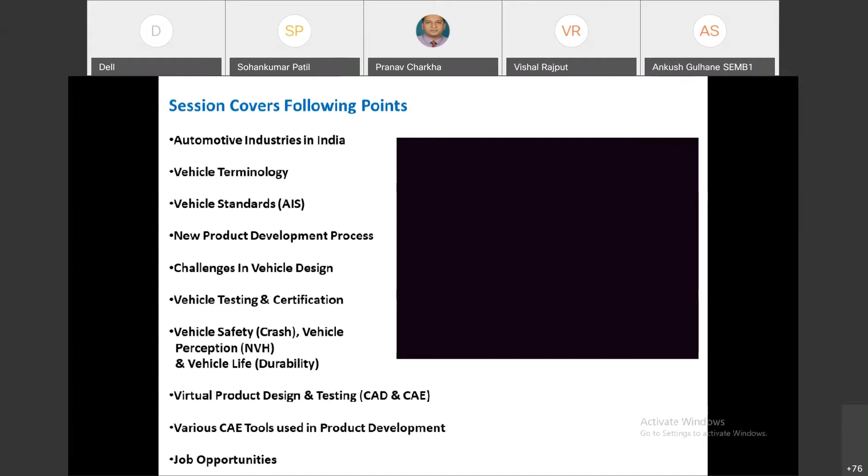Now what will this session cover? The session will talk about the different automotive industries available in India, vehicle terminology, vehicle standards, how the product development process happens in the automotive industry, and what challenges industries are facing nowadays. Then I'll throw some light on vehicle testing and certification, different types of testing, and we'll talk about the main topic - virtual product development and testing. Then different softwares used in industry, and what are the opportunities in each area.

When we say automobile, this is basically a French word - auto means self, and mobile means movable thing. So it covers different types of automobiles, not just a car. It may be a two-wheeler, a passenger vehicle, a commercial vehicle, or a three-wheeler. Nowadays whatever automobiles are displayed on screen are running on IC engines, but today's era is about EVs - EV is capturing the market.

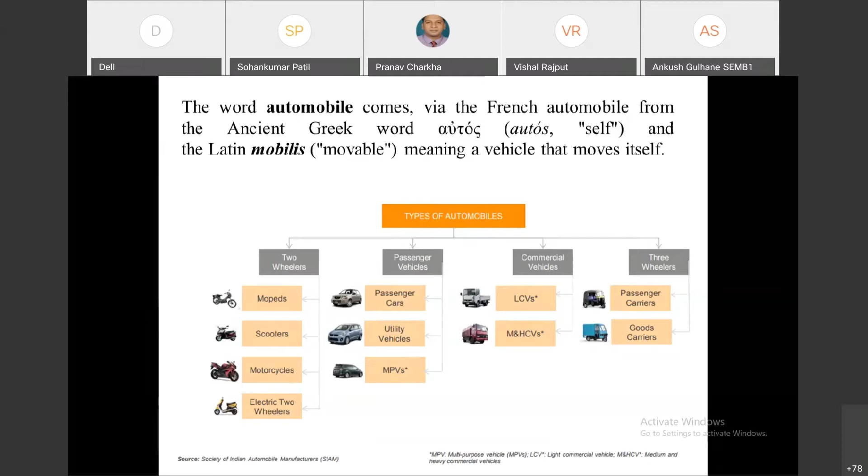Development of an automobile is not just a single part - in that automobile there are many sub-assemblies. Take example: there is a body, then a powertrain, a transmission system, a suspension system, controls, and certain electrical and electronic connections. If there's AC fitted in the vehicle, it's called the HVAC unit - heating, ventilation and air conditioning - and different types of mechanisms are used. So development of a new vehicle comprises all these kinds of system development.

For body design, powertrain, transmission, suspension - for each aggregate, for each part, in industry there are separate departments. If you're developing a car, the body development will have one design department taking care of that body design part. There's a need for a mechanical engineer who can design those different types of cars. If it's commercial, he can design different types of trucks, or if it's a defense vehicle, different types of defense vehicles. So there's a requirement of mechanical engineering in all these areas - different groups will be there, and in each group the mechanical engineer is required.

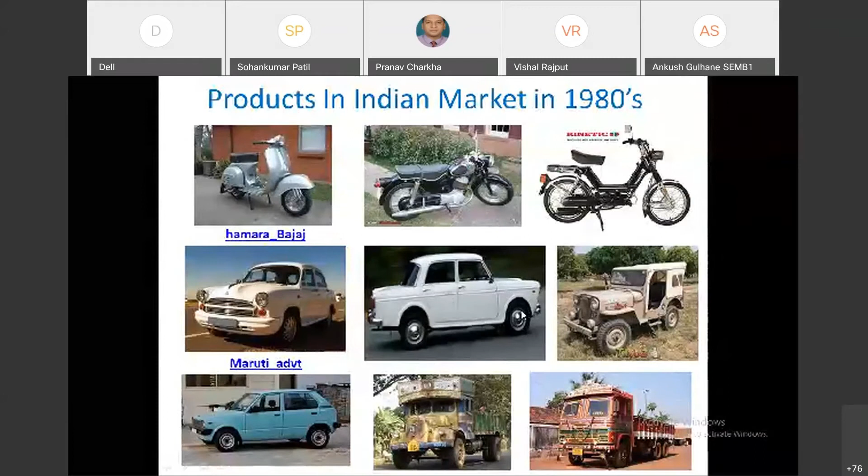Now, regarding the shape of the cars, if you look at the shape of those cars, it was like a box kind of shape. Now in today's market, if you look at these vehicles, they have a very curvy shape. So aerodynamic shapes are being developed nowadays for increasing the fuel economy. Because the Indian customer is very choosy, the customer wants a better fuel economy car, as well as a low cost car. So there are various car manufacturers in India which are selling their products in different segments.

So whenever we say a new product is being developed, then there's a front, the doors, the cabin. Okay, so one by one we'll see each and everything.

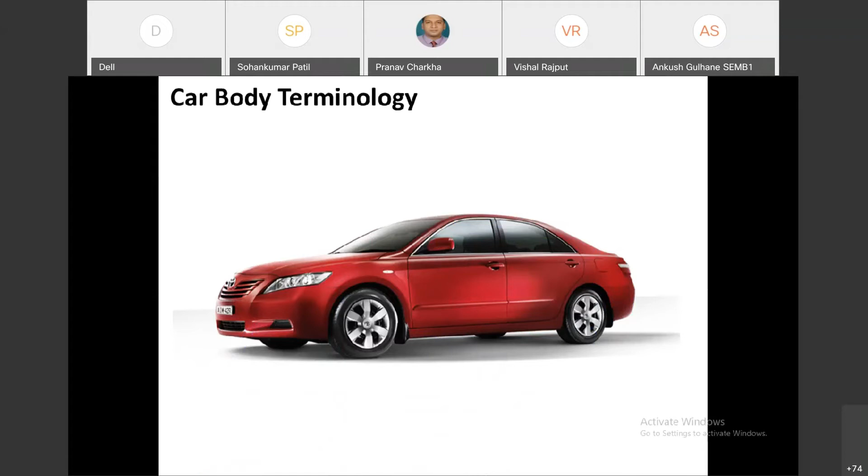Then the middle portion is called the B-pillar. Then there is a roof. Then there is a C-pillar. Then there is a boot space, mostly we call it the dicky, for storing the luggage. Then there are some rear quarter panels. Then there are glasses. Then the passenger front door. Then there is one part called the fender. Then the front bumper. So this is the automobile terminology.

Now when we say a product, what do we mean by a product? Say you're studying a design subject. In these subjects, you're designing different types of couplings, different types of gearbox. Whenever you are designing couplings or a gearbox or a shaft, you will need certain information. Like if you want to design a gearbox, what should be the torque capacity, what should be the speed, how many gears will there be. Okay. So likewise, every product will have a specification. Now what kind of specification will it have?

Say an automotive company wants to develop a new car. Whether we want to develop a sedan car, a hatchback car, a sport utility vehicle, what kind of car we want to develop, then for how many passengers? Is it for 2 people, 4 people, 6 people, 7 people? Then what should be its maximum length, maximum width, maximum height? Then what should be its maximum weight in order to get better fuel economy? Then what type of engine do we want to use? The crux is every product will have certain specifications.

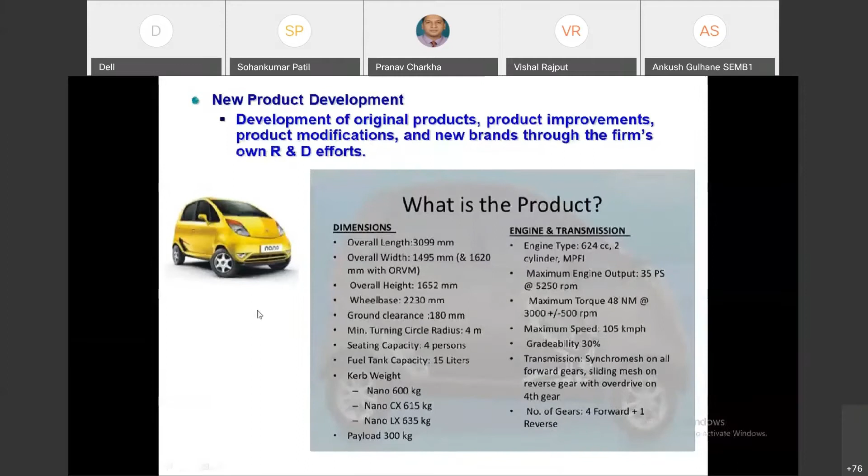So how exactly does the new product development process start? Let us assume the development of, say, the Tata Nano. A Nano car is to be developed, and the target is a car for 1 lakh rupees. Now different ideas will be generated, like how it can be possible to develop a car in 1 lakh rupees. So ideas may be like this,

an auto rickshaw kind of thing, where the body will be metallic but the cover will be a polythene kind of thing. Or a second idea: can we have a plastic car, can we have an aluminum car? So different types of ideas will be generated based on the marketing information. Now those ideas will be screened and shortlisted. After screening those ideas, the initial concept will be developed. Any industry follows this rule. It's called the design and development process.

Screening. After finalizing the idea, the concept is developed and that concept is tested. Testing means different kinds of tests will be done on the automotive product. In the subsequent slides, we'll see those tests. Then the marketing strategy will be defined, like in this area we are going to sell these many products. Because whenever a new product is being developed, you will not believe it, 1,000 crores. It may range from 1,000 crore to say 5,000 crores.

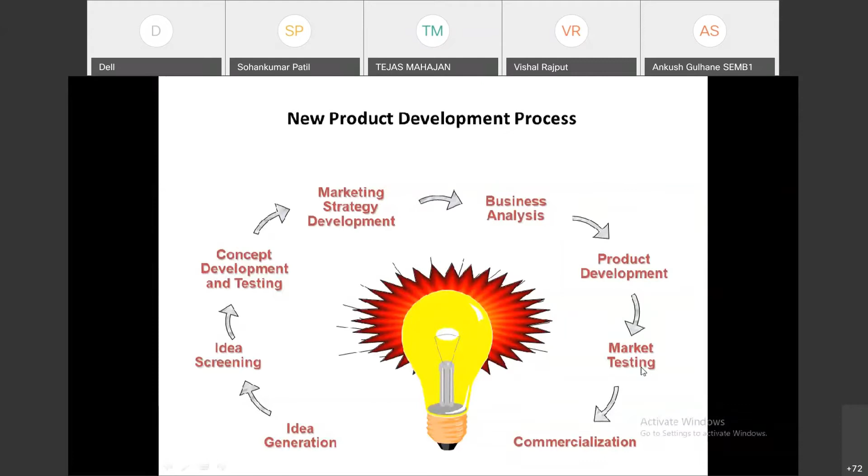Now every product has a certain life cycle. Like a human, whose lifespan ranges 50, 60, 70 years, in a few cases 100 years, likewise every product has a life cycle. Take the example of mobiles. Nokia was initially very popular; its popular model was the 3310. Subsequently they launched new products. But nowadays Nokia is nowhere, because other mobile manufacturers entered the market. So there was a certain lifespan for each and every product.

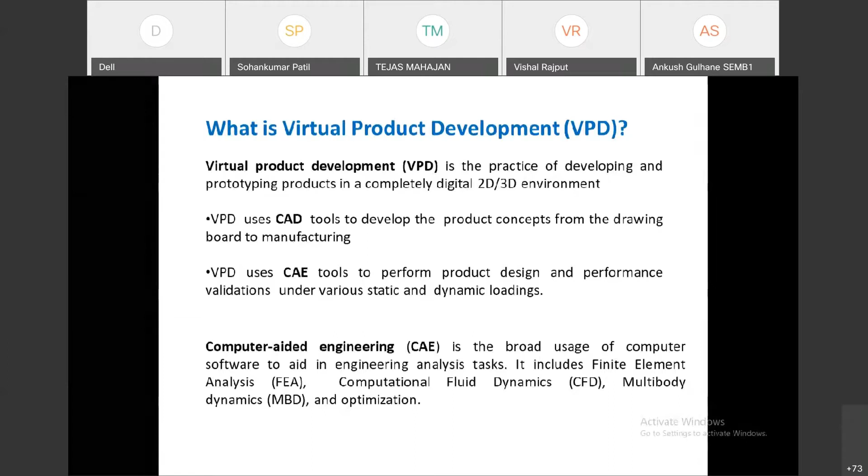Now in the market you will find these different types of cars. You can see the aerodynamic shape of those cars. Okay, so this kind of car is called a hatchback. This is a sedan. These are the pickup vans. Then there is an SUV. Then it is an MPV. Few of the commercial vehicles also you find moving on the road. So buses are very well known to you.

This is one of the products from Tata Motors. It's called an SFC 407 kind of truck. So this is a medium commercial vehicle. For more than 30 years this product is still in the market. This is very, very popular in the market, because it gives better fuel economy and maximum earning to the people who are buying that product. So that's why it is still popular, and the company has continued with this product. Even though they have launched different types of products, they have still continued with the production of this product.

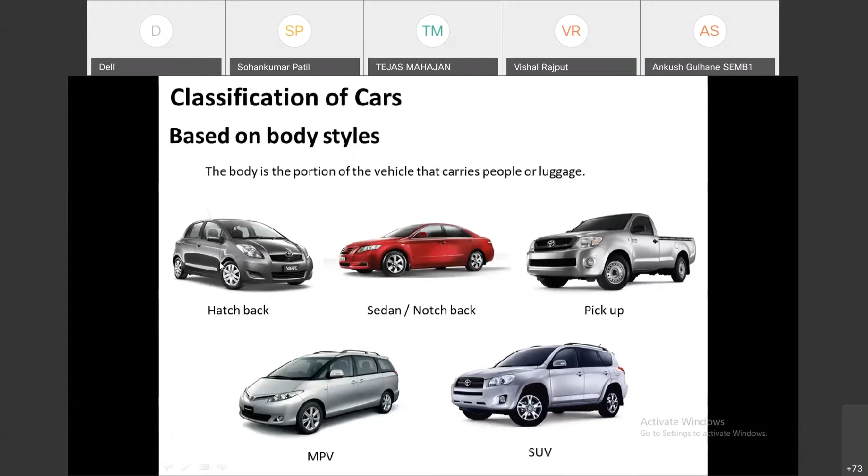So all your commercial vehicles are developed based on this. So this is the basic foundation. On this foundation the structure will be constructed. But in case of some utility vehicles, or some of the pickup vehicles, this chassis is being used. So these vehicles are very, very costly. There are certain advantages of the monocoque construction or monobody construction versus these ladder frame constructions.

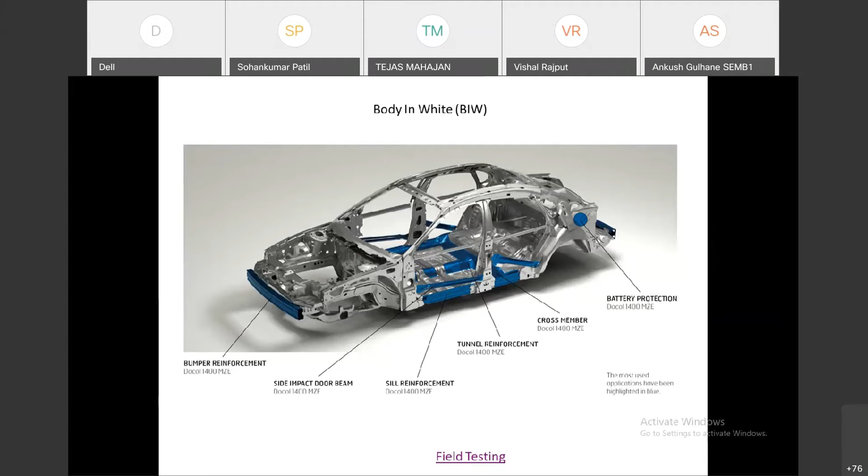So there are many challenges in front of automobile manufacturers. The greatest challenge, the important challenge is about fuel economy. You can see the Maruti ad, very, very popular.

Sir, may I present to you the super luxury yacht, the Nefertiti. Apart from all the luxuries, it has 6 luxury suites, 3 kitchens, a mini golf course, a 3D theatre, 2 ballrooms, and to top it all, it has a top speed of 25 knots.

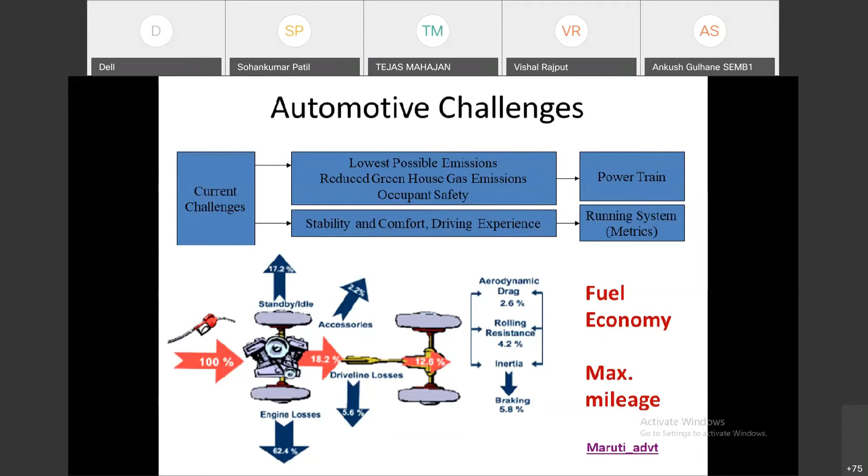Another challenge is variability in the components. No two parts are the same. There is a word called same and similar. Like we said, these two guys who are twins, they are similar, but they are not the same. Similarly, because of the manufacturing facility, limitations in the machine, limitations in the tools, no two parts are the same.

So it may happen that the product is launched, and when it is running in the market, running on the road, the part may fail. So in the initial phase itself, if it is within warranty... whenever you buy a car, they will tell you 75,000 kilometers or 2 years, whichever is earlier. That is the warranty the automobile manufacturer gives. But it doesn't mean that after 75,000 kilometers the car will not work or it will fail.

In actual case, the life of a car, when it is designed, is say 10 years. Or whenever you register in the RTO office, whatever taxes we are paying, that registration is valid for say 15 years. Now recently the policy has changed: after 15 years, the used car, if its condition is unhealthy, should get scrapped. The policy came recently. Earlier there was no such policy. Even 20-30 year old vehicles are running on Indian roads, polluting the environment.

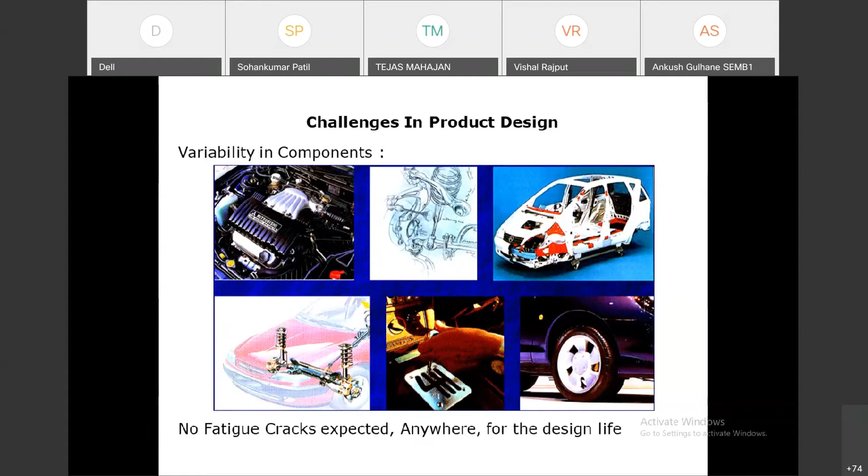All these images I got from Google. All the contents of this presentation I collected from Google. I have just compiled this presentation. So these images are just telling you.

So if it is a 4 people car, normally the total weight of the total payload is stated as 300 kg. But it will not be just 300 kg. Maybe there is some luggage carried by the people, so that luggage weight we need to consider.

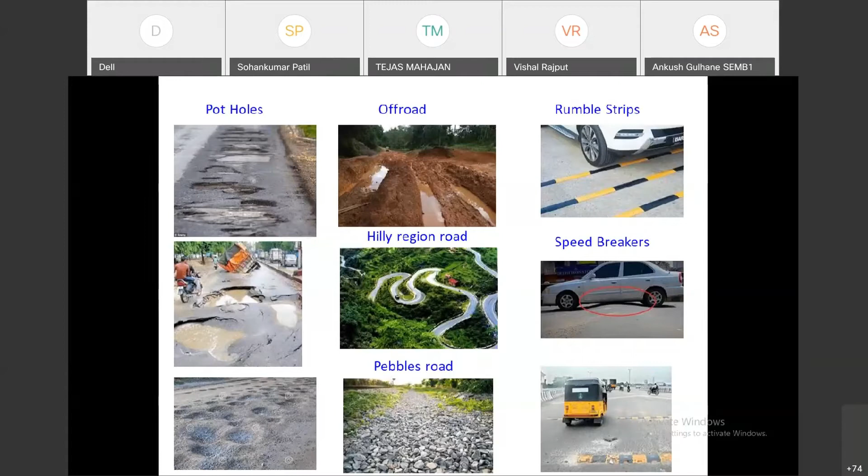Now, in a vehicle, what does the customer expect? If you are the customer and want to buy a new vehicle, these are some of the parameters automobile manufacturers take care of. The most important parameter is safety - if you are buying a car and tomorrow some accident happens, all the passengers should remain safe.

Based on that, you might have heard the star rating of the car - 3-star, 4-star. Tata Nexon has got a 5-star rating. So that star rating has started now. When it is said a 5-star rating, it means it will ensure that in case of any kind of accident within the specific speed limit, nothing will happen to the passenger. Many times on YouTube or WhatsApp, we get forwarded messages like a car drops in a valley and still the passengers are safe, nothing has happened to them. So safety is the topmost priority.

Then there are some acoustic kind of things - the car should not be noisy. Then there is some air conditioning requirement. Now most of these things are mandatory - seat belts are mandatory, airbags will be mandatory. In the cars, you will also find different variants coming, like LX, SX, DX - some luxurious kind of vehicle, some base model.

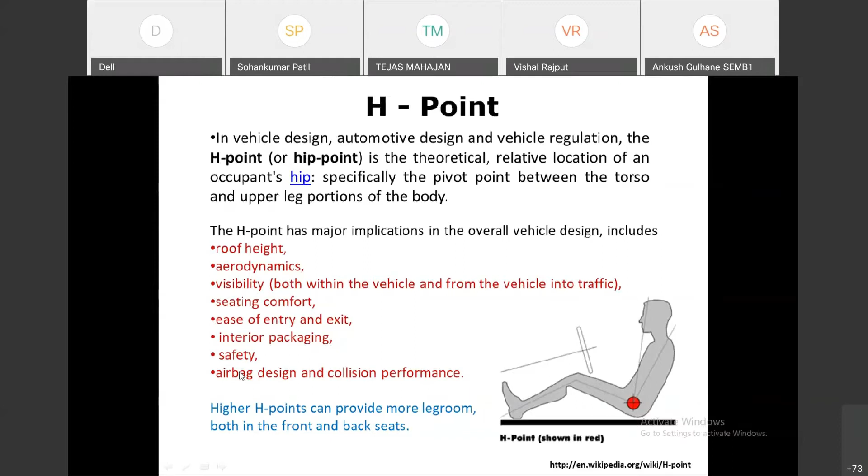Based on the reference of this H point, all the parameters highlighted in red color - roof height, aerodynamics, visibility, seating comfort, ease of entry and exit, interior packaging, safety, airbag design - all these parameters are being designed. Now the next figure will explain this.

Depending on the driver height, maybe the driver height may range from say 4.5 feet to 6.5 feet. So all the height ranges need to be considered, whether it is a male driver or a female driver. All these parameters are being considered.

So H point will tell you whether whatever controls are there - the accelerator, brake, clutch - whether they will be accessible or not. Nowadays, if you see the seats, they are...

available with certain mechanisms called adjustable height seats, or you can move the seat forward and rearward. So in order to take care of the different heights of the passenger based on their hand length or leg length, these parameters are being designed. So this is very, very important.

So H point is very, very important. That H point will tell you all these parameters - whether steering wheel accessibility is there, how much roof space is available. It shouldn't happen that the person's head gets impacted whenever the vehicle moves over a speed breaker. The driver will have a bump kind of feeling, and when he bounces, there should be sufficient gap available between the roof of the vehicle and the head of the passenger. So that H point is very, very important.

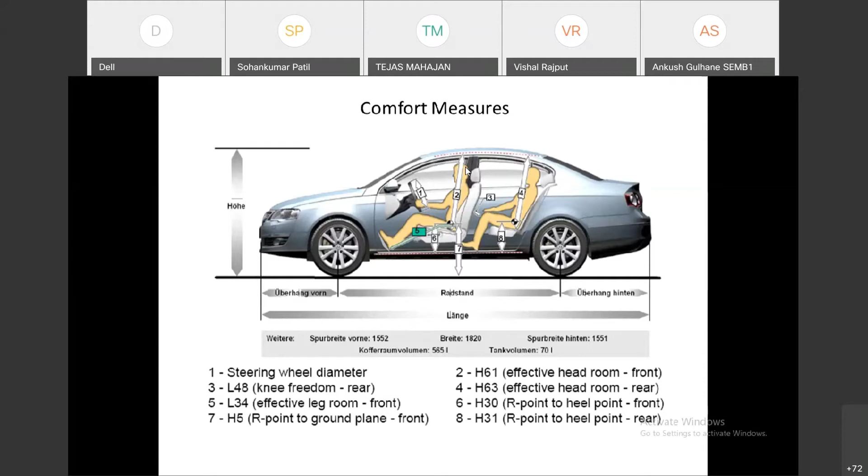Now earlier we saw some BIW kind of structure - this is called the body in white structure, BIW. As I said, safety is very important. Another aspect is durability. Durability talks about the strength of the object, strength of the part, strength of the car - the part should not fail under any severe loading. Now you may not be knowing, all these products are being tested so severely.

So let us just see the video. That video will tell you how severely the products are being tested. Similar tests - because of confidentiality I am not showing any Tata Motors videos, but I am just showing the video from YouTube. It is readily available, that is from Ford. Okay, so you just see this video.

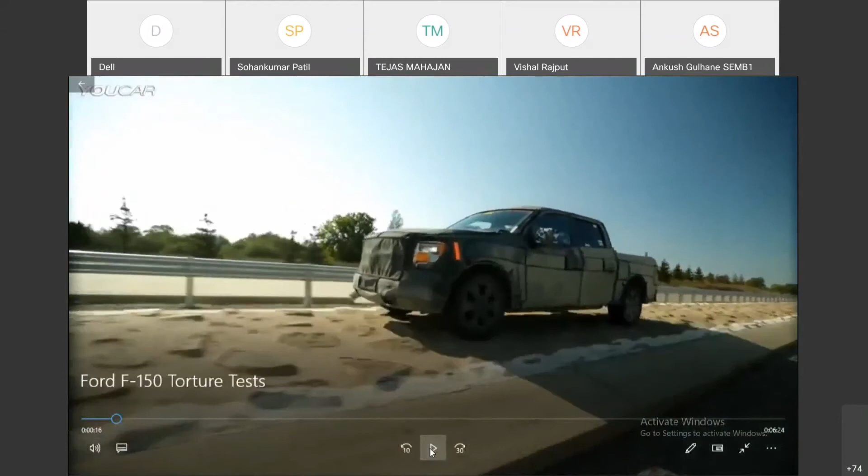So this is one of the testing tracks which is showing different potholes, different stones. These type of tracks are available in the automobile industry, as well as ARAI - Automotive Research Association of India - that is in Kothrud, Pune. They also have these kinds of testing track facilities. There is a VRDE in Ahmednagar. They also have these kinds of testing tracks where vehicles are being tested.

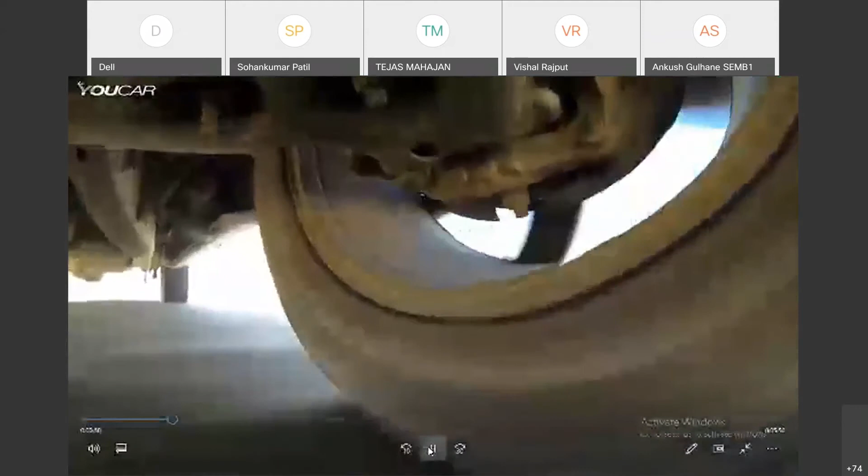Now, apart from the field test or testing track test, there are certain in-house tests which are carried out by the testing department. The testing department comprises two types of people - instrumentation or electronics engineers who take care of some measurements, and mechanical engineers who take care of the testing of those parts. So for physical testing of the products, there is again the requirement of a mechanical engineer who takes care of all these types of tests.

Now for this testing, there is a specified test cycle for a specified number of hours, for a specified number of days. The product is being tested. This will give us an idea of whether the earlier design is meeting the target or not. If it does not meet the target, again the redesigning process will happen. So this is called a bench test, or also called a rig test. In your workshop, in your labs also, there are some small testing facilities available - it's a similar kind of thing, but only for testing the vehicle.

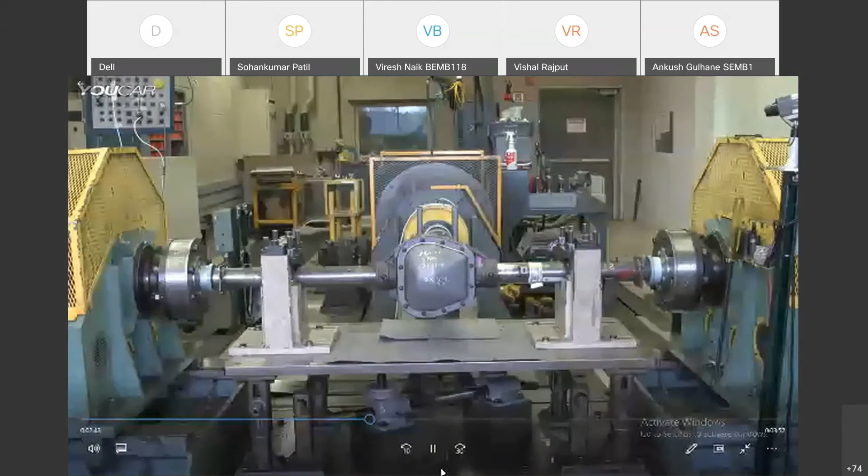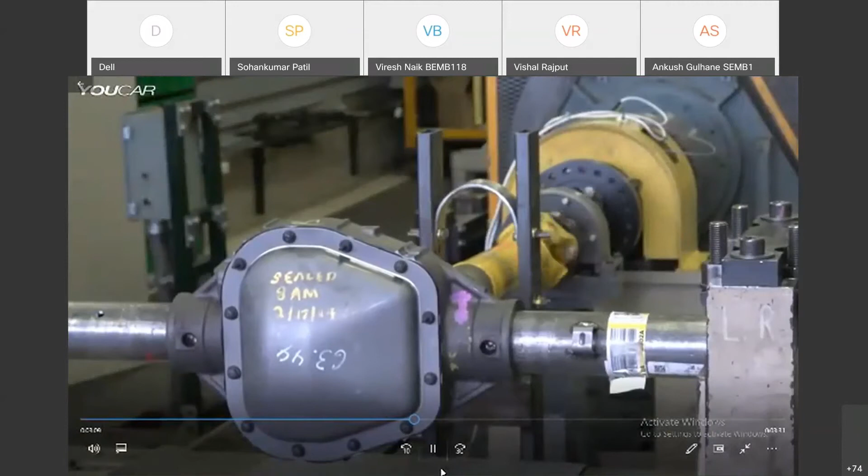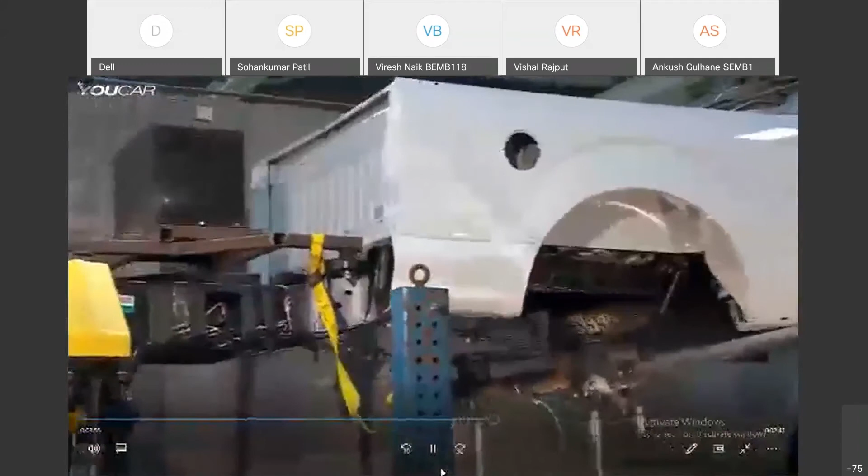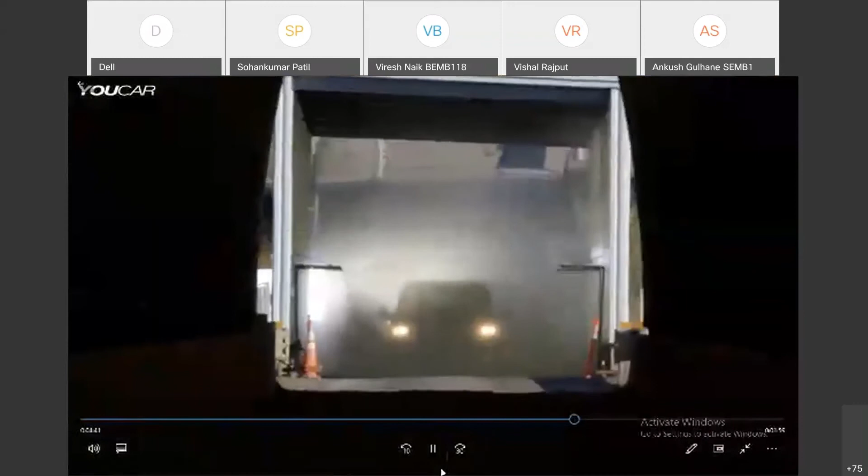Kind of test, like whenever the vehicle fails, then towing should be carried out. So what will be the towing speed of the vehicle? Then corrosion test - this is mainly for the paint.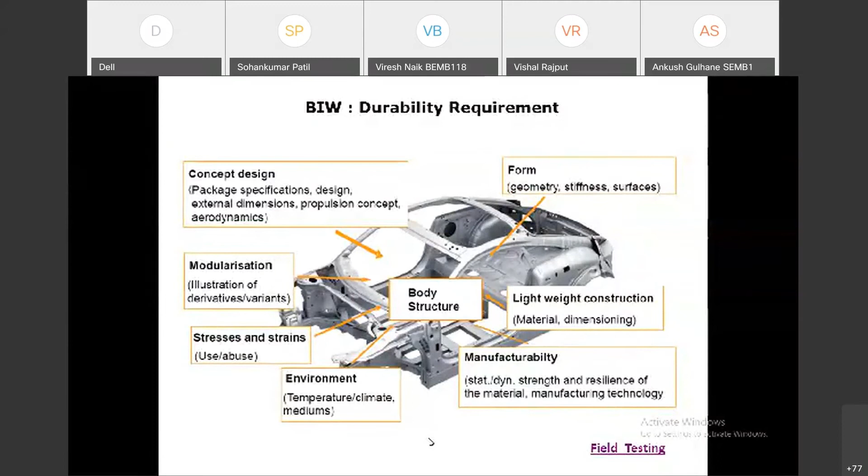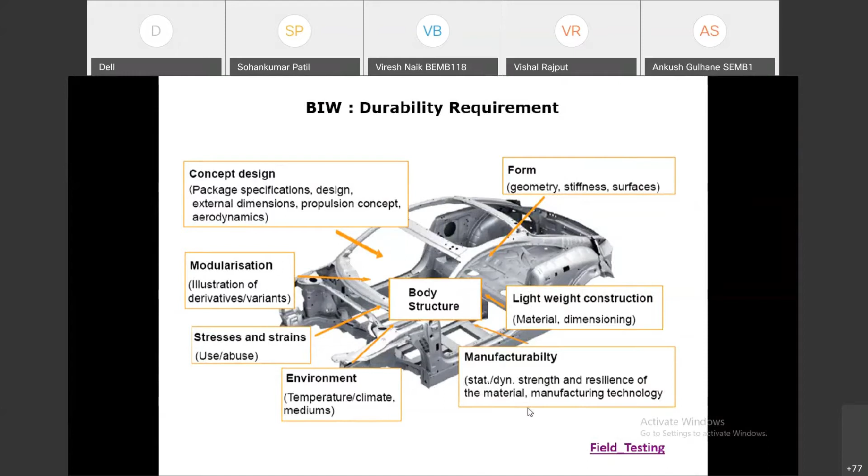So how the suspension is behaving whenever the vehicle moves on bumpy roads - these are the different types of tests that will be conducted onto the physical part. Now, apart from these tests, this session was talking about durability. Durability is taken care by the testing department. There will be few people who carry out the test in-house, and there will be field trials also, field testing also. In both the departments, the requirement of mechanical engineer is there.

Another aspect of the vehicle is the crash requirement, crash strength of the vehicle. Now, if somebody hits from the front side of the vehicle, that will be called a front impact. So the front zone of the vehicle should have good strength. If somebody hits from rear, or from the side, or if the vehicle rolls over - in many cases during an accident the vehicle rolls - so all the structure, the A pillar, B pillar, C pillar portions, should have good strength. So let us just see this video, crash testing video.

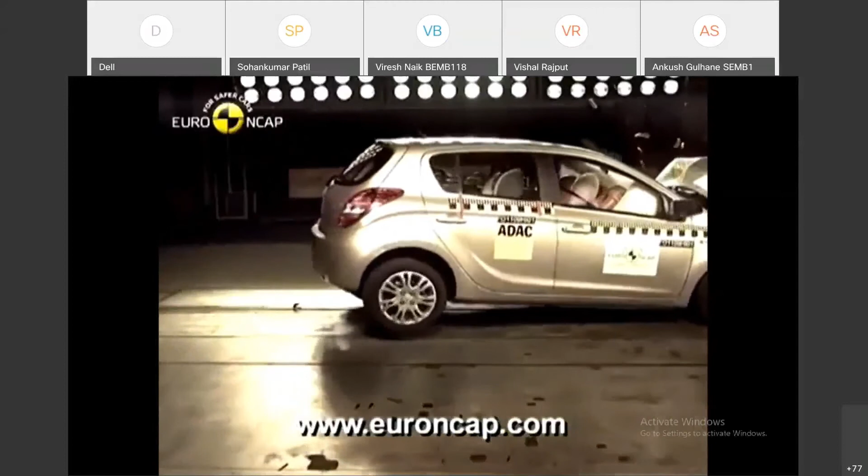This is for Hyundai. The airbags got deployed. So this was about the crash test.

Then apart from crash, there is another area called NVH - noise, vibration and harshness. This is also very, very important. The vehicle in which you are sitting, if it is very noisy, you will become uncomfortable. Noise will be generated by different parts - noise generated by the engine, noise generated by the wheels, and because of the air also the noise gets generated. If the vehicle is noisy, nobody is going to buy it. So there are certain regulatory norms like what should be the noise in the passenger cabin, how much decibel noise is permissible.

Then what should be the pass-by noise - suppose you are standing on a road and suddenly the vehicle passes, then how much noise the vehicle can generate and how much will be acceptable. So noise and vibration are very, very important. Now all this noise and other things are related to frequency - frequency is a very important parameter. For a single degree of freedom system, as you have studied, the frequency is 1 by 2 pi root of k by m, where k is stiffness and m is mass.

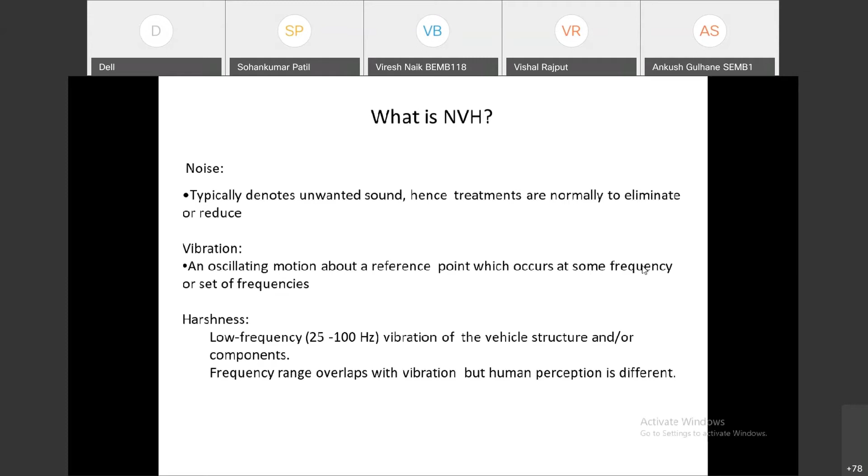Everybody has already gone through the tuning fork experiment in schooling as well as in college - what are the different types of frequencies the tuning fork generates and what are the different shapes, called mode shapes. Now to extract the frequency or these mode shapes, there are softwares. They will tell you, if it is a seat, what will be its frequency; if it is a tire assembly, a suspension, a car, or a mirror.

Now on the two-wheelers also, if you will notice, after a few days the mirror will start vibrating and the vision will get blurred. So there is a regulation for the mirrors also. When the vehicle is moving at maximum speed or minimum speed, there will be a range of speed. In the first gear, the speed will be minimum. In the second gear, third gear and top gear, as the gear changes, the speed of the vehicle changes. So accordingly, the vibration input or excitation will also change, and the part will vibrate.

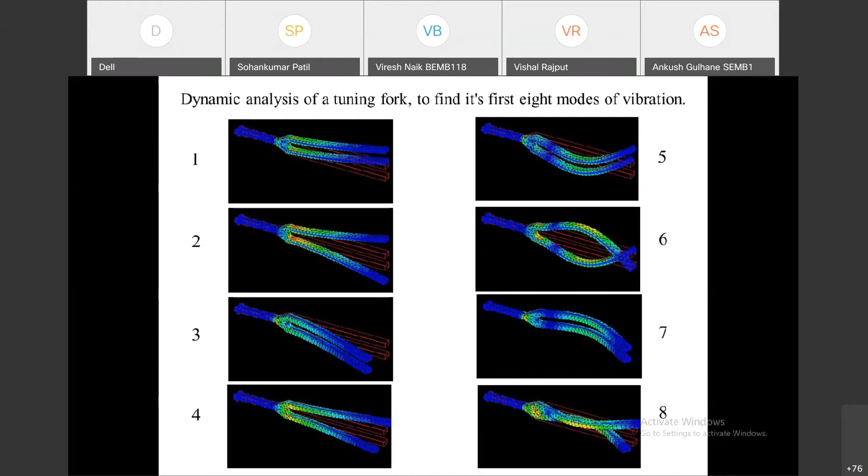So in final year, you are studying the vibration subject. The knowledge of that vibration subject is very, very important. And in the automotive industry, NVH is a separate department. There are two areas. One is NVH CAE, who do the simulations using software, and there is NVH testing. In these two departments also, there is a requirement of mechanical engineers.

Suppose you are driving a car on an expressway at say 60 kmph, 70 kmph, then you can easily see the view. But the moment you increase your speed, slowly your vision will get blurred because your eyeball frequency will change, and that will affect the vision. So many times accidents happen because of overspeeding. So frequency is a very, very important parameter.

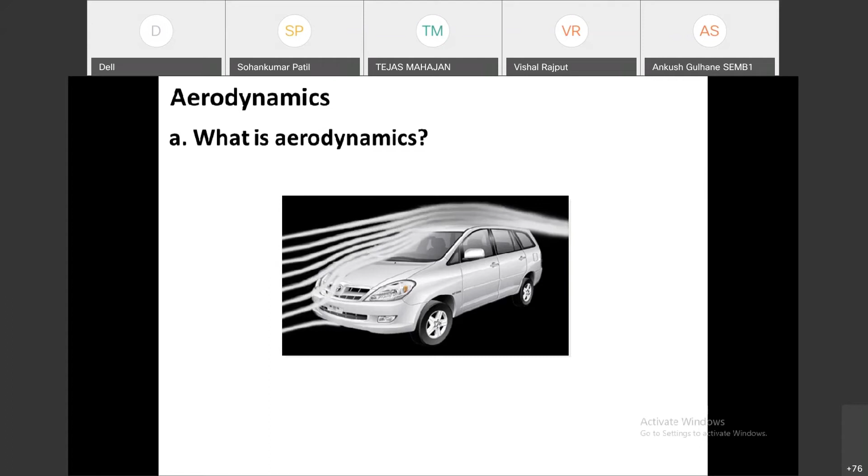You have to show your vehicle physically. There are some testing requirements related to the overall dimensions of the vehicle. All these testing agencies require people, and those are different types of engineers: mechanical engineers, instrumentation engineers, ENTC engineers.

So all these engineers are also required in all these testing agencies who will take care of all the things. So when I said we have seen the crash test, we have seen the durability test, these types of test facilities are available with these industries. And there are the regulations which need to be met by the automobile manufacturer. Even for your registration plate, there is a regulation.

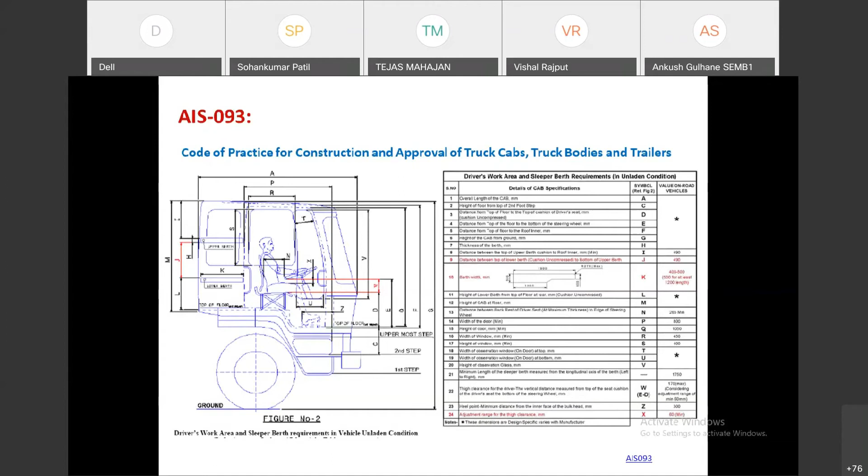The solution is that all the industries nowadays are using these virtual tools, the CAD and CAE tools, for testing their products. So this is our main topic now, computer aided engineering, use of computers for design and development of products. Now I'll be talking specifically about CAE. CAE mainly talks about the analysis part, called finite element analysis. Maybe third and final year students are aware of FEA. Second year students may not know, but in the next slides I will explain in short what we mean by FEA.

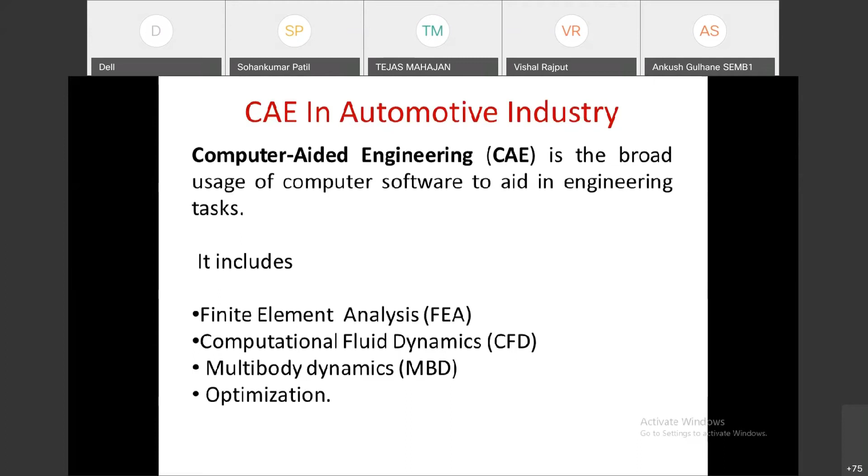So industry initially uses CAD software for designing the parts. Once the CAD model is available, that CAD data is given to the CAE department. Every industry now, whether automotive or non-automotive, has a CAE department where mechanical engineers specifically are required. In CAE, mechanical or automobile engineers are required. Nobody from instrumentation or ENTC will work in CAE, only mechanical and automobile engineers, or in a few cases, production engineers.

So these CAE tools benefit the industry. They're reducing the design and development time. Long back, we have seen the product life cycle or the design cycle. Earlier, to design a new product, from design phase to launch phase, almost 6 to 7 years were required. Now that design cycle has been reduced; in 2 or 3 years, industry is launching a new product.

These softwares are improving the safety of the product. They are helping to improve the durability. Means they will tell you the part is not meeting the strength requirement in this area, please add material.

As well as these softwares, they have features of optimization, so you can optimize the product. So there are n number of softwares, CAE softwares, available in the market. So one by one, we'll just go through those. Okay. So if you just search on Google for CAE software, you will find a huge list.

So mainly CAE software talks about the CAE process. CAE software uses the method of finite element analysis, mainly known as FEM or FEA. FEM stands for finite element method, and FEA is finite element analysis. So this FEA or FEM method comprises three different steps. First is called pre-processing, where the finite element model will be built.

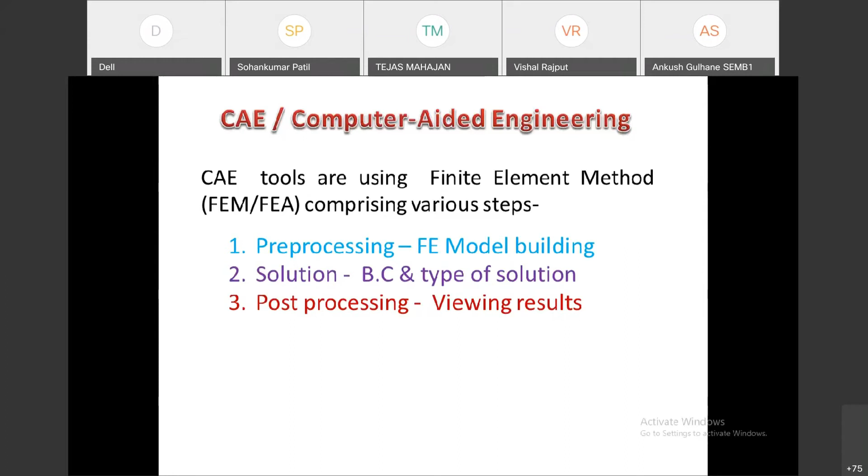Now in this finite element model, you can fix the bottom portion, so you can block the degrees of freedom. In theory of machines, you have studied different types of joints. There is a ball joint, a socket joint, a slider joint. Then you know about the degrees of freedom. So you can fix the bottom portion, and if the person is climbing the steps, you can apply the weight of the person on any of the members, and you can check the deformation pattern, you can check the stresses. So CAE software will require a finite element model.

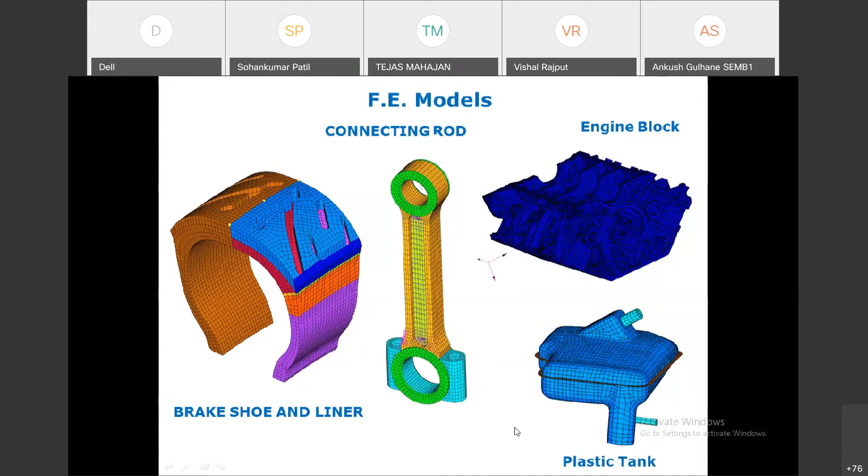Now these are a few examples of finite element models. This is a brake shoe liner. The middle one is a connecting rod, then there is a plastic fuel tank. These types of finite element models are created using the Altair HyperMesh software, or another software called ANSA. Now what this software will tell you, if it is a static kind of analysis, you can extract the deflection, you can extract the stresses, strains.

Now in strength of materials, you learn all these things. What are the different types of stresses? There are shear stresses, bending stresses, combined stresses. Then different types of strains. Okay. So shear strain, normal strain. You can extract the forces, you can extract some energies.

If it is a heat transfer analysis, then in the heat transfer subject, you have studied heat generation, you have studied some plate example, like one end of the plate is heated at, say, 300 degrees centigrade. On the other end, the atmospheric temperature is there. So how will the temperature distribution happen? A similar kind of analysis can be carried out in these softwares.

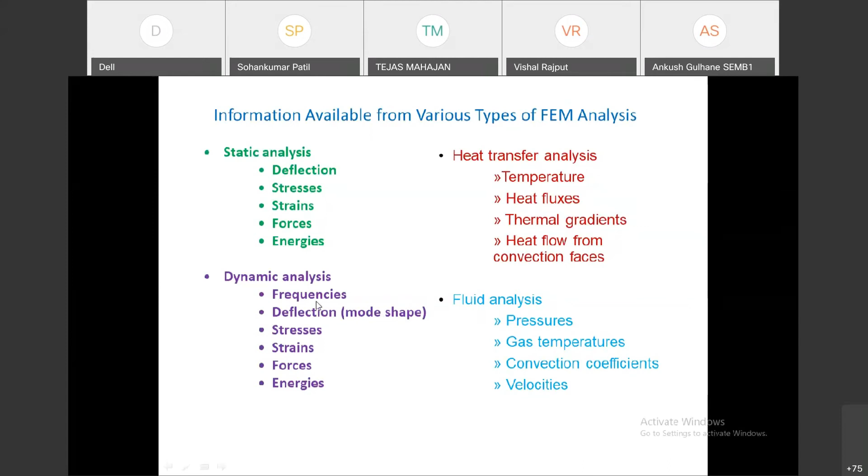If it is a fluid analysis, let's say your fluid machinery subject, fluid mechanics subject, whatever equations you have learned, Euler's equation, Bernoulli's equation, these CFD softwares are using those equations, and they will tell you the different types of outputs. If it is a dynamic analysis, you can calculate the frequencies, you can calculate the stresses.

Now in industry, one of the most popular softwares is multi-body dynamic software. So whatever vehicle test we saw, in one of the vehicles, I told you, just look at the suspension, how the wheels are vibrating, how the wheels are moving on the bumpy road. So vehicle handling is very, very important. Suspension design is very, very important.

So for designing the suspension, the purpose of suspension is to avoid the vibrations which get transferred from the road to the passenger. So suspension uses different types of springs. There may be a coil spring, there may be a leaf spring if it is a rigid suspension.

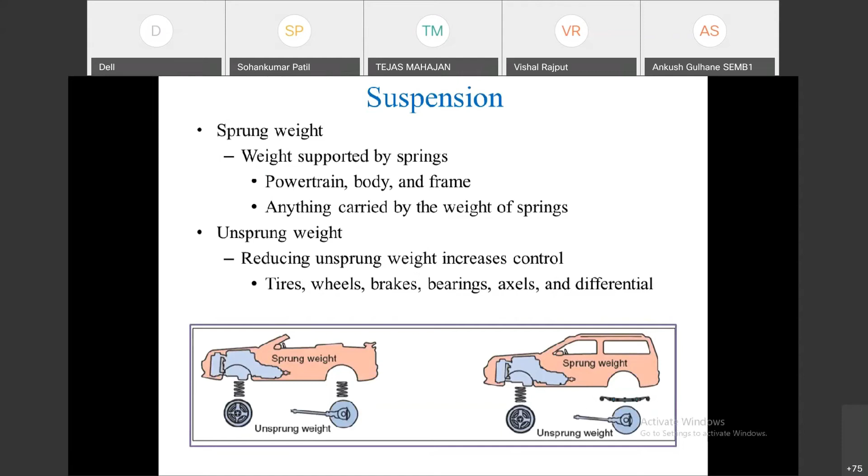So for carrying out the analysis, one analysis is called a strength analysis, another analysis is called the performance of these linkages. Now in theory of machines, you have studied the 4-bar chain mechanism, then slider crank mechanism, or different kinds of mechanisms. Now how do these mechanisms work? So for carrying out the mechanism analysis, multi-body dynamics software is used. That software name is MSC Adams. So in CAE again there is a subgroup called the MBD group, which takes care of all these kinds of mechanism type of simulation.

So there are again good opportunities. Very few people work in this area, in the MBD area. Even if you want to do your post graduation, you want to do MS, this is again a preferred subject, vehicle dynamics. Very few people are available in the vehicle dynamics area, and a lot of good packages are being offered to those engineers who have a good knowledge of vehicle dynamics.

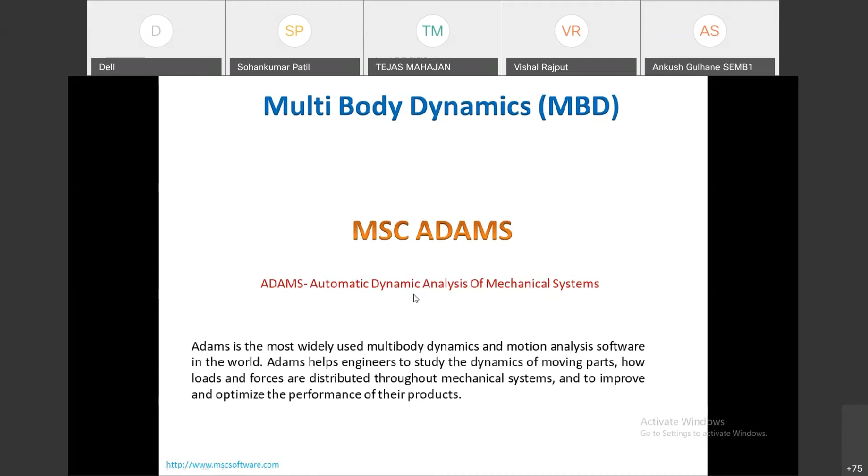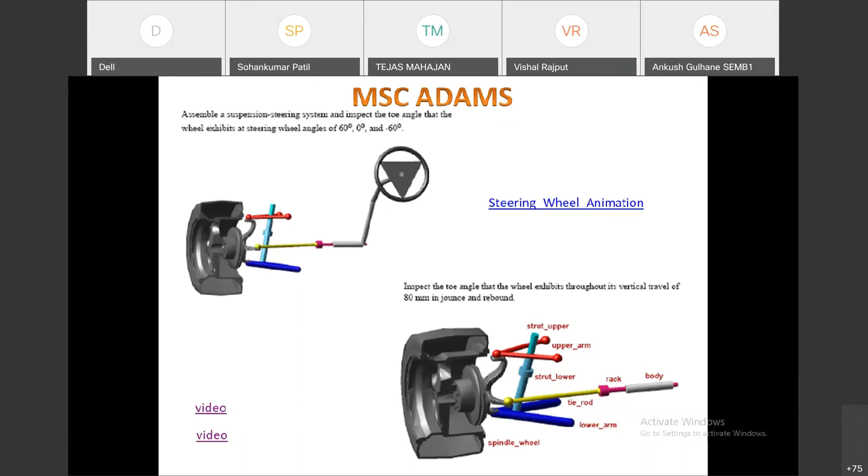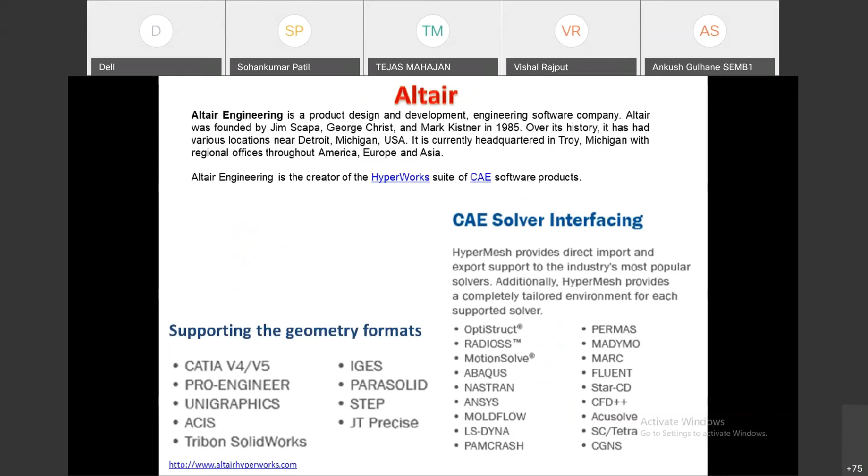This is another software, Altair, which I just talked about. Altair is a very popular software. This software company itself has huge offices in India. They also require mechanical engineers in their offices. So they are also supporting the automotive and non-automotive industries. So this is just a GUI of that software.

Like the CAD model is imported. So the CAD model comprises only surfaces. There are some surfaces or solid parts. They will be imported and the meshing activity will be carried out. Now this software also has the feature, apart from meshing, that the analysis can also be carried out. So Altair has its own solver called OptiStruct. There you can carry out the different types of analysis. So strength analysis. So you can see some of the color snaps. They are showing different contours.

So say there is a stress. If this is a wheel, in the wheel rim, because of loading, which are the areas? So the color contour, depending on the color code, red to blue, will highlight that this is a sensitive area. Here the failure may happen.

So the software is indicating that failure is going to happen, say in the spoke region, particularly in the fillet. So there extra material should get added. So before actual manufacturing, the part is getting tested virtually using these softwares.

Again, one of the good features of the software: say an automobile manufacturer has designed a 3-meter car, and they want to design, instead of 3 meter, a 3.2 meter car. So for 200 millimeter extra, this software has a feature called hypermorph. Whatever existing model is available with you, the same model can be stretched. It can be extended in any way, either on the length or on the height. So different combinations can be tried out using this capability.

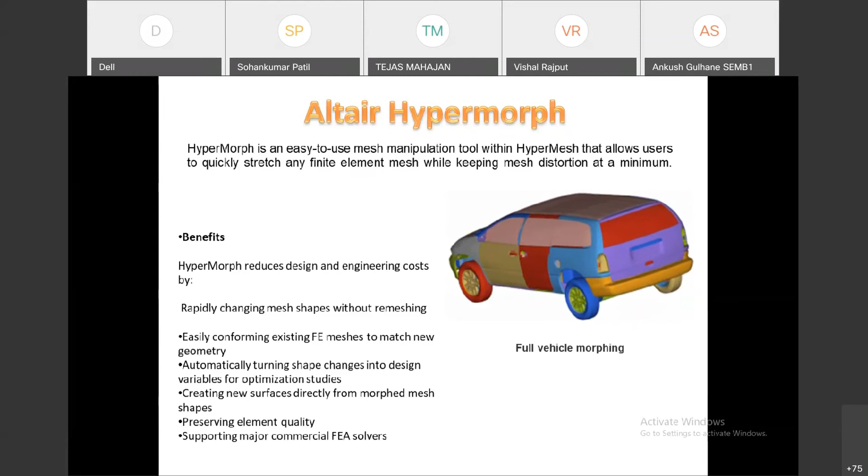So it will not require any geometry. That will again save a lot of time. This is another thing: instead of a small wheel, if we use a big wheel, how will the vehicle look? So again, there is a morphing feature.

This software, not only Altair but other analysis software also, has the capability of carrying out optimization of parts. Now optimization mainly falls in these 4 different categories. One is called topology optimization, another is shape optimization, next is sizing optimization, and there is topography optimization.

So what do you mean by topology? Suppose there is a C shape. Now in this C shape, wherever the bolting region is, we said this much material is minimum required. Now depending on the load condition, whatever loads we apply, the software will tell you, on the extreme right hand side, the pink and yellow color image, that this much material will be sufficient to sustain the load being applied onto this part.

So apart from this material, whatever excess material is there, the software will remove it. So material saving, again, means reduction of weight of the vehicle. This type of optimization is called topology optimization. The bottom example will clear the concept. There is a C shape, but instead of this C shape, with whatever spoke shape we got, a lot of material is being saved. So this is called topology optimization.

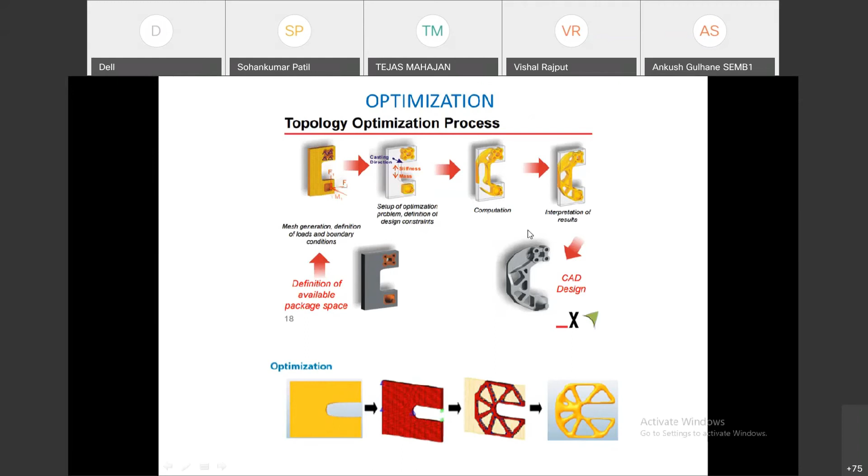Another is called topography optimization. Now every body or every part has certain stiffness. So without changing the material, without increasing the material, just by adding certain depressions, the stiffness of the part can be increased. The shape of the part is the same, but for improving the performance, improving the stiffness, the software has given the red color: in this area, if you add the depressions, the stiffness of the component will increase. There will not be any increase in the material, but instead of a plain surface, depressions will be added.

So this is the contour given by the software, and finally the design engineer will decide, okay, this way we can give depressions. So a lot of time will be saved. Instead of testing this kind of part and it failing to meet the requirement again, the software is telling you to add the depressions, and there will not be any weight penalty.

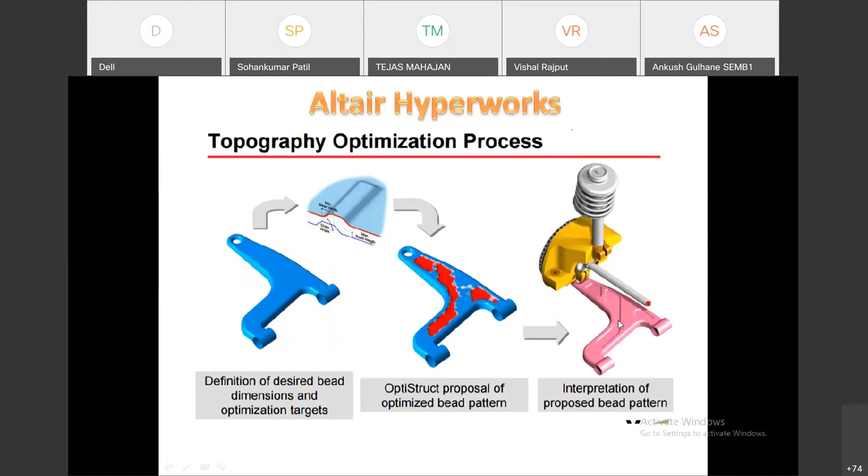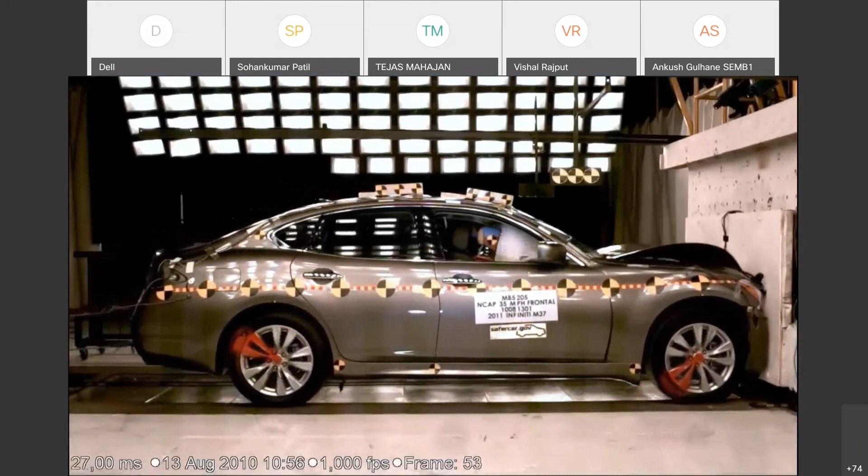Then there are different types of crash tests. As I mentioned earlier, there is roof crush, frontal impact, side impact, rear impact, then pole impact. So just go through these videos and look at the severity. So in the crash test, once the test is performed, the airbag got deployed.

Now, whatever physical test you saw, once the physical vehicle gets impacted onto the rigid wall, it's of no use. For the second test, you will require a second vehicle. If there are say 10 different types of tests you want to carry out physically, 10 different vehicles will be required. Now, when the proto models are being built, at least one vehicle will cost in crores for the automobile industry, because it is still the design phase.

So for the initial proto vehicles, whatever X number of vehicles the company builds, each costs in crores. The customer gets the vehicle for say 5 lakh, 10 lakh, 20 lakh, but the industry, for the few initial products, will require this much cost. Now, after testing it, if we come to know our vehicle is not meeting the requirement in crash performance, the process will come again. Not only crash, there are other tests also, like in frontal impact, the seat belt test.

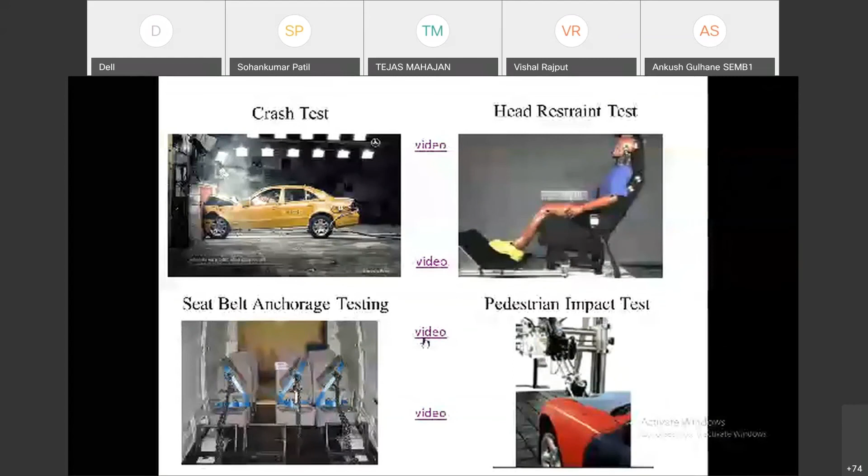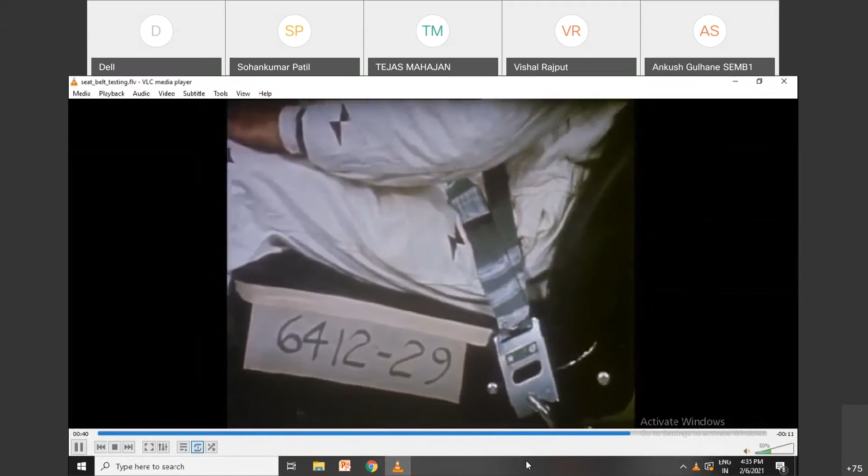Now this is about the seat belt testing. Just look at closely. So in this case, the seat belts, they are tested. So seat belt material as well as the seat locking mechanism, that is getting tested. But nobody does the way it is being shown.

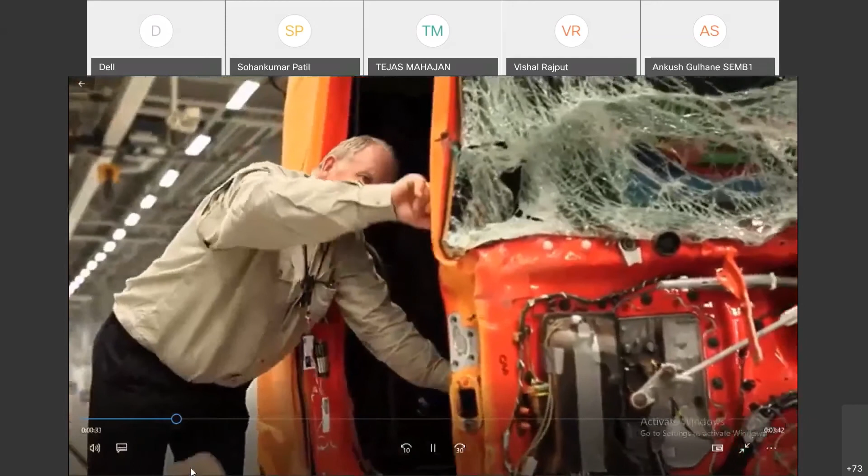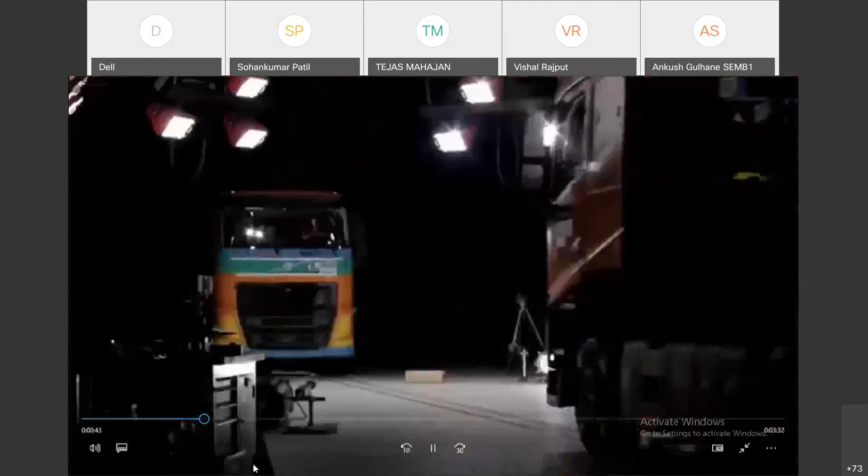Safety is something we've had with us since day one. It's part of our heritage, and today it's one of our most important core values. The new FH series is really truly state of the art when it comes to safety, because we've put all our knowledge into this new product. Functional design is key when it comes to safety, and one of the main.

So now in this type of testing, the physical damage has happened to the vehicle. The dummies, they are being used for testing the vehicle, like during impact, what will happen to passenger, different types of sensors will be fitted. The person was measuring the dimensions. So he was measuring how much survival space was available for the passengers, whether that steering wheel, it intrudes into the stomach or into the chest of the driver. So they are checking the survival space.

Now all these physical tests, they are done in the CAE software. Instead of doing it physically, now using CAE software, LS Dyna, all these testing, they are possible. So in automotive industry, there is one crash department. Crash department, again, two areas: physical testing, they will take care of physical test, and second is virtually using CAE. So crash group uses LS Dyna, which is very, very popular. There are again PAM crash software. So n number of softwares are available in the market, but LS Dyna, this is very, very popular. So if somebody knows the LS Dyna software, again, good opportunity for mechanical engineering into the crash department.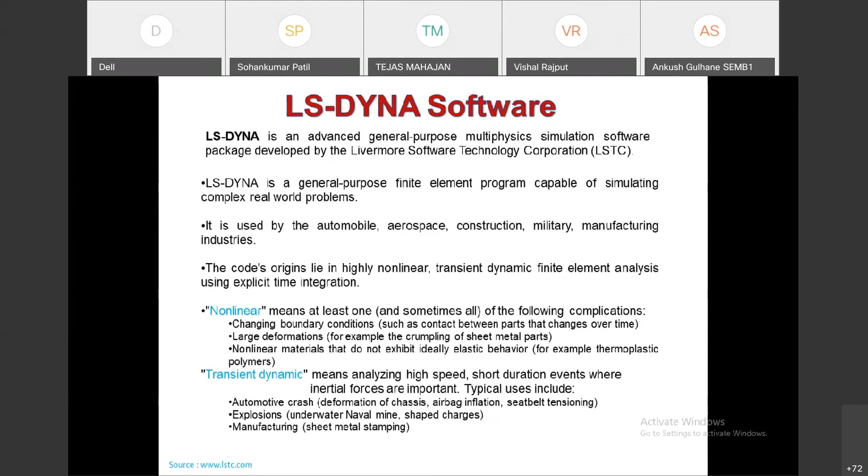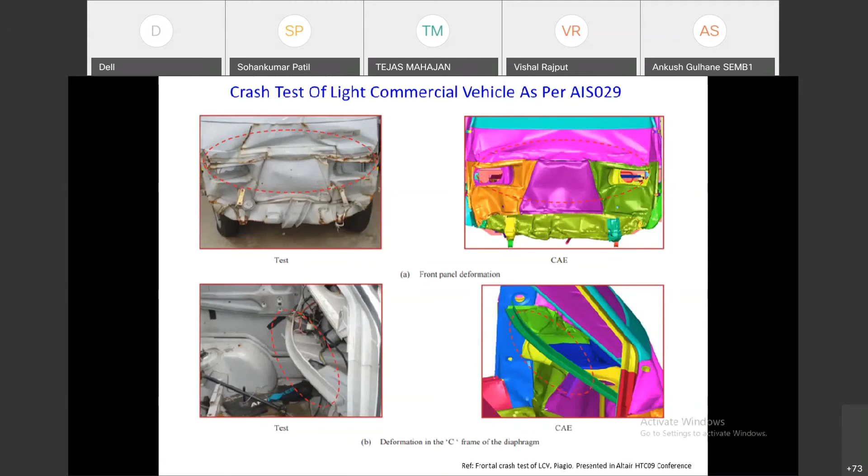So here you can see there is one kind of test called as a frontal impact test. The standard is AIS 029. So this is just a model, the CAD model or FE model. The actual vehicle is being impacted, and after impact, now what will be the behavior? So you can see this is the physical damage to the vehicle, and this is shown in the CAE. On the right hand side, they are the finite element analysis models. On left hand side, the actual images are there. So there is a good correlation being set up now.

So based on this, also the certificates are being given. Apart from analysis, now in manufacturing area also, you guys have studied the manufacturing subjects. So different types of metal operations are being performed, because when we see different panels and different parts, so that should get manufactured. In manufacture area also, the simulations are being performed, manufacturing simulation, whether there is a panel thinning effect, panel wrinkling is there or not. So regarding the metals, some simulations are there.

So this is one kind of simulation. Just punch and die. So that will tell you, the red areas will tell you the material thinning will happen. Again, another, the punch is moving, there is a die. So before actual designing of the punch and dies, how the material flows, so that can be also simulated in the simulation softwares. So this is called as a forming kind of simulation.

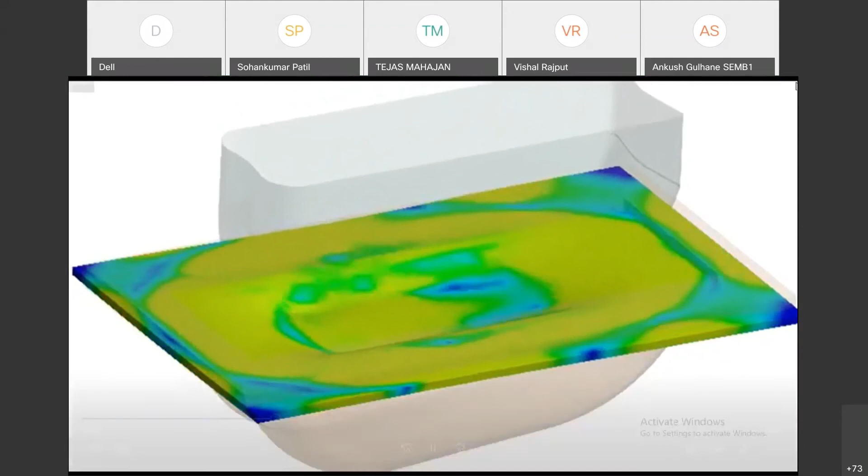So in this case, wherever red appears, it is showing that material thinning is happening in that area. Based on that, design modifications will be carried out.

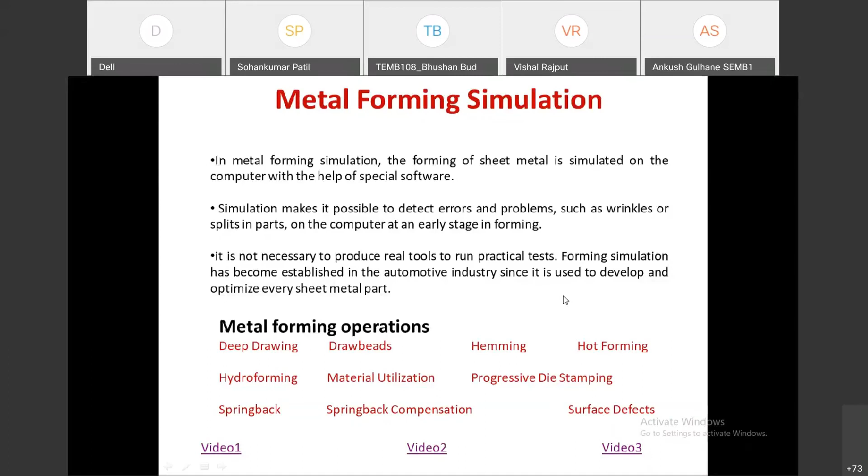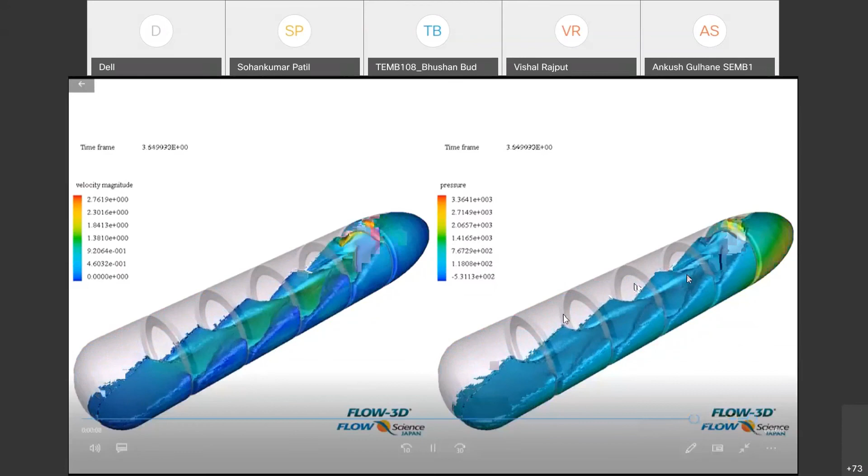Another kind of simulation is called sloshing. Like when you fill fuel into vehicles, how the fuel moves into the tank. Movement of the vehicle causes impact onto the walls of the tank. So this is a fluid versus metal interaction.

Suppose if it is a tanker, whenever the tanker is moving, how the water moves, how it gets impacted. Because of the impact of water, will there be any failure? Will there be any leakage? That can also be tested. This simulation is called sloshing simulation.

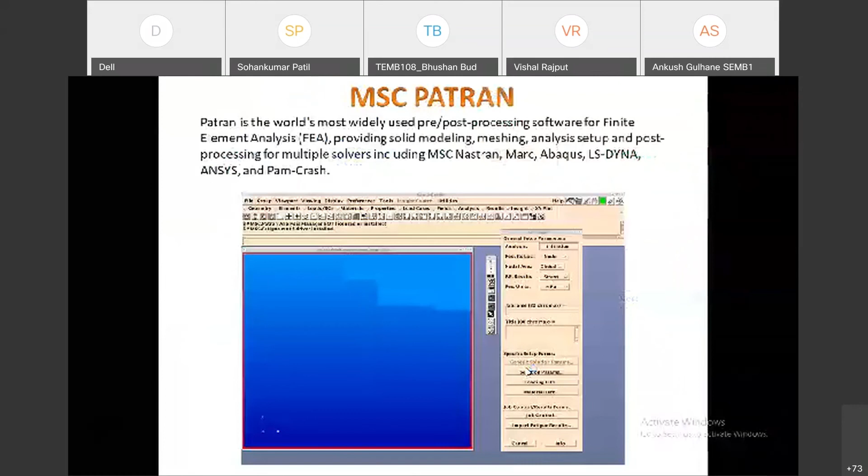As I earlier mentioned, various softwares are there - ANSYS software, MSC Patran software, Nastran software, Abaqus software. So this is all about product development and testing, physically as well as virtually, in all the areas I have mentioned, in all these departments in automotive industry, mechanical engineers are required.

In few areas, post graduation is compulsory. Say for example, in CAE field, PG is a must. But there are few industries, say service industry kind of thing, where graduate people can be absorbed. Initially they will do meshing activity and slowly learn this analysis kind of thing, or they can start learning CAD kind of softwares so that there'll be good opportunities.

Now, not only in India but abroad also - in Japan, in US, in UK, again in Germany - in all these areas there are good opportunities for the CAE engineer. So this was just a glimpse of product development and CAE software.

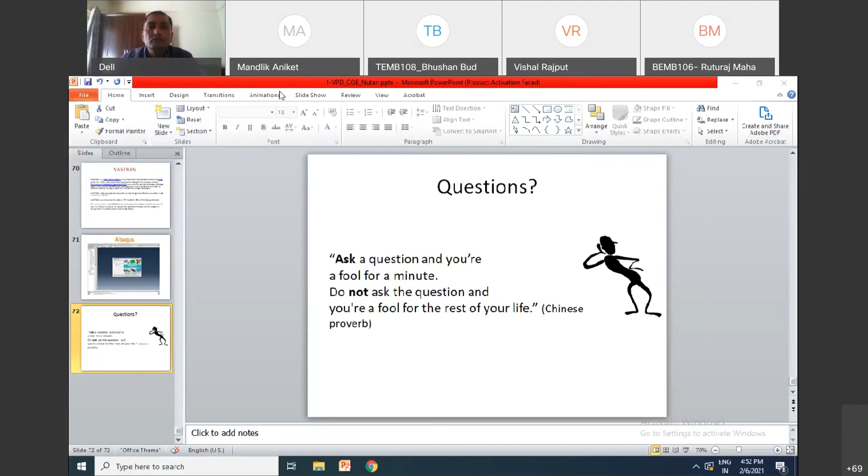Chandan Desai is again asking whether in upcoming years all IC engine vehicles will be replaced with electric vehicles, and what is its possibility. See, 100% replacement is not feasible as far as India is concerned, because the huge power requirement will be there. As far as power is concerned, now for domestic as well as farming use, we don't have sufficient power, so that will require station installation also. A lot of research is going on for improving the range of batteries for EVs, because if you want to travel from Pune to Kolhapur or Pune to Mumbai, in one go you can reach there, but if a charging station is not available, how will you return back? So it depends on charging stations as well as cost of the vehicle, which is also high. How much subsidy the government provides is also an important parameter. And again battery life - battery charging and battery life - maybe after 7-8 years a person has to replace the battery, and in EVs the cost of the battery is the highest. So as of now, 100% replacement definitely will not be possible in India, but subsequently, based on infrastructure availability, it will happen.